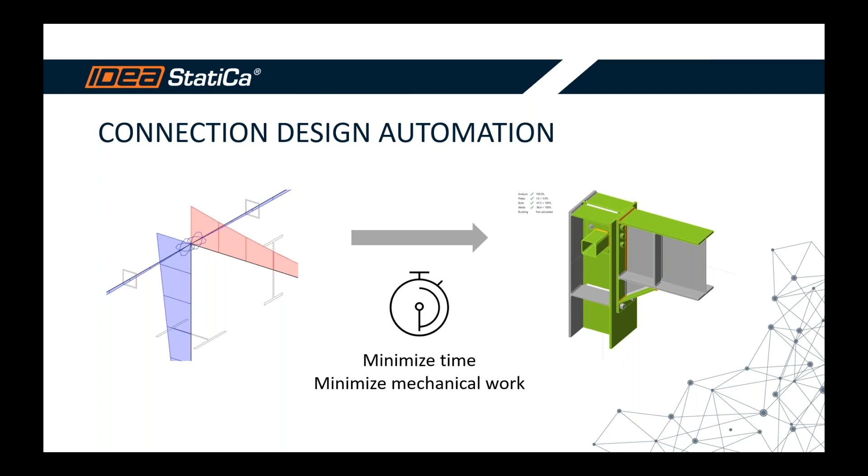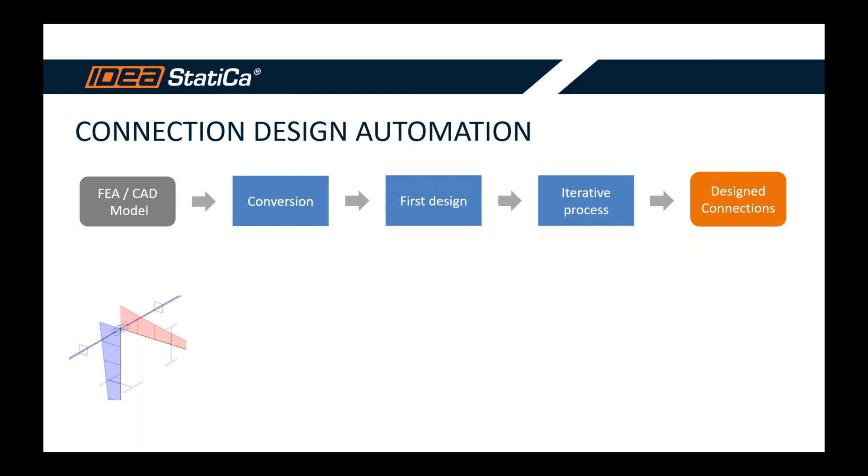And we've identified a couple of intermediate steps to get to that goal. First, you have your global structural model with your directions, members, internal forces. And that needs to be translated into something StatiCa can also understand. So once you are in StatiCa, you can do your first design, and most likely it will not be the optimal one right away. So you need to iterate and optimize, add stiffness, change the plate thicknesses, bolt dimensions, etc. And then you arrive at your final design. And finally, you are left with a well-designed connection.

The understanding part is facilitated by the IOM, Idea Open Model, and I will introduce IOM in a minute. This second part is again facilitated by our Idea plugin that is able to interact with StatiCa. And I will also talk about Idea plugin before Nathan shows it in a demo. So what is IOM exactly? Idea Open Model is an open source C# framework, and it can describe structures. And it can describe them in a way that StatiCa can understand them.

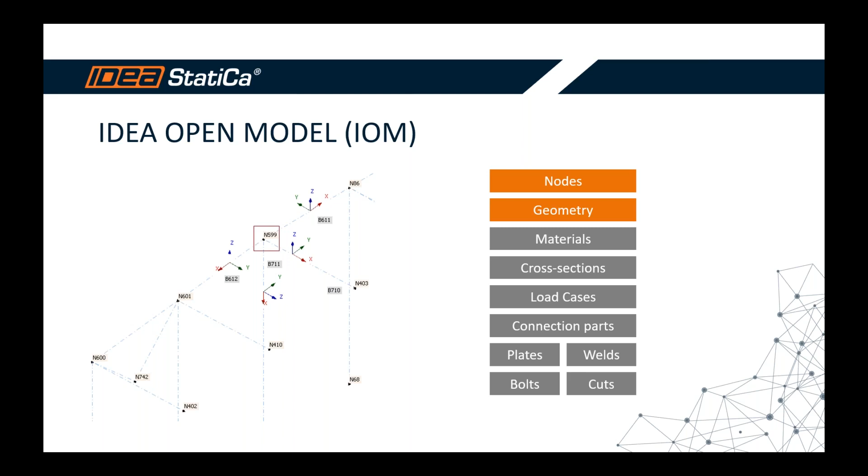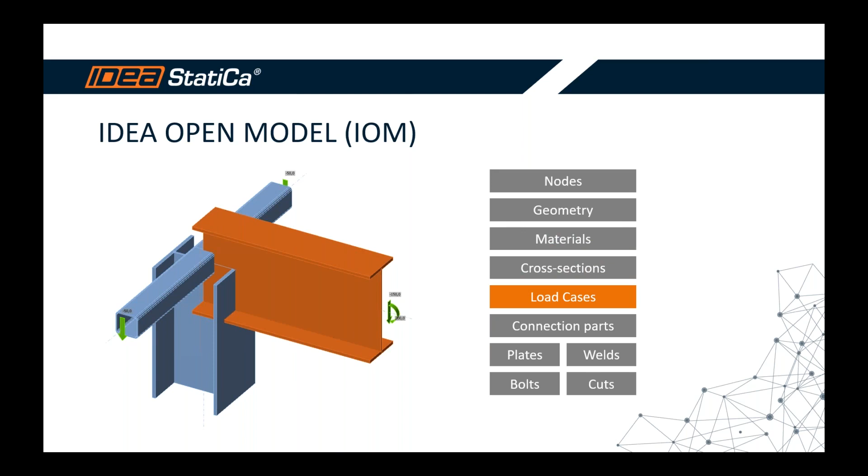And let's look at the IOM. Let's look at the parts that compose the IOM. So in the IOM, in the open model, you have your nodes and your geometry, firstly. So directions of your members, their local coordinate systems, etc. Then you also have cross sections and materials that are used in the model. Also, there are internal forces that we use as actions to load our connection models. And finally, the IOM is also capable of storing the connection parts.

If you are a user of StatiCa connection, you know that you apply and construct the connection using manufacturing operations. What is stored in the IOM are not the manufacturing operations themselves. These are just the basic parts, exploded operations into very easy to describe and very easy to communicate parts, such as plates, welds, bolts, and cuts.

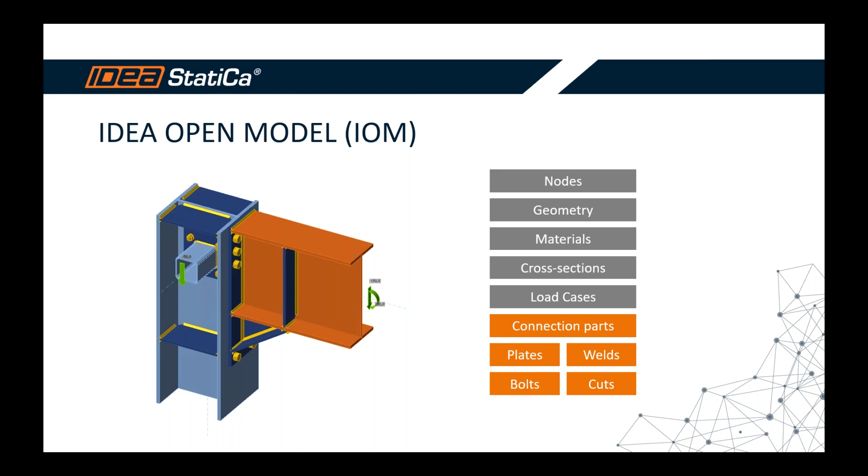Now, I just want to briefly mention templates. Templates can be used to transfer manufacturing operations, and now I am talking about the ones that you use in a connection app, so end plates, wideners, and you can transfer them between IDEA connection files. So what templates do, they store information about these manufacturing operations and their sequence. So basically store information about the connection design. So I can take a naked connection on the left, and by applying a template on top of it, I can receive a designed connection on the right.

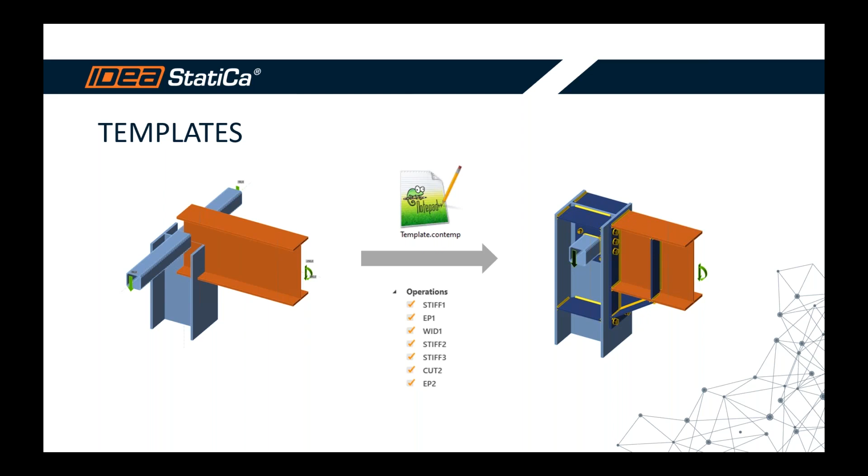Parameters are another very useful tool, mostly for optimizing. They are available in the developer tab, which by default is not visible in the connection app, and you can learn about accessing it on our GitHub wiki.

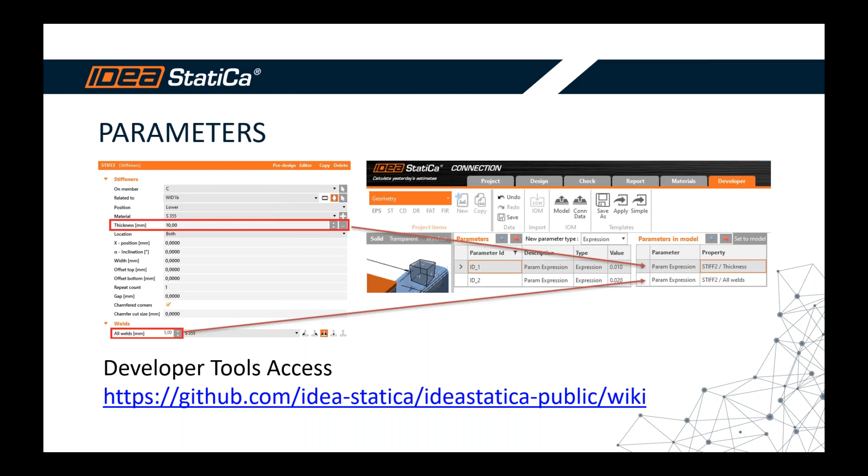But before the example, the last and perhaps the most important part, the Idea StatiCa plugin. This is basically our API, a way to interact with the software using code. And you can use it to take, for example, the open model file and create and save an IdeaCon project. This is a project that you know if you work with Idea StatiCa. It's a typical project file containing a connection design.

So you can create it using the plugin, and you can also use the plugin to then interact with it, apply templates to it, update your loads, set parameters, and of course run analysis and read the results of the analysis. Idea StatiCa plugin can be called using Python or any other language, and it can be integrated into your visual programming tools such as Grasshopper, Dynamo, Jupyter, Excel even.

So while we will be using C# today to demonstrate the workflows, don't worry. If you've never seen Visual Studio before, you don't actually need to know the ins and outs of everything, how to write the code in order to take advantage of all of this. You can perhaps use a tool developed by somebody like Ryan to make use of this.

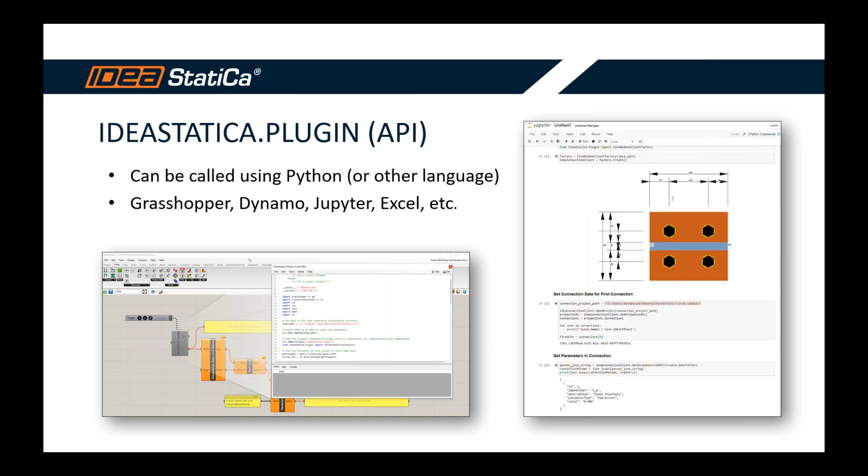So hopefully I managed to explain the difference between the IOM and the API. While the IOM defines the underlying model, the API allows you to interact with it. You don't actually have to have a license of Idea StatiCa to generate IOM, but you need it in order to use the calls in the API. That requires you to have a license and to have Idea StatiCa installed. You can also take advantage of our NuGet packages that are available, the Open Model NuGet for IOM and the plugin NuGet for the API.

So now coming back to my first slide, showing the steps you might take manually when designing a connection. We can take another look at it, but now using automation. So you would use IOM to translate your structure into something StatiCa can understand, and then use API to generate a connection model on top of it. In order to get the first design in, you would apply a template. And in order to get to your optimal design, you would get and set parameters until you arrive at a satisfactory calculation result. And then when the connection design is basically done, you might want to export the results, for example.

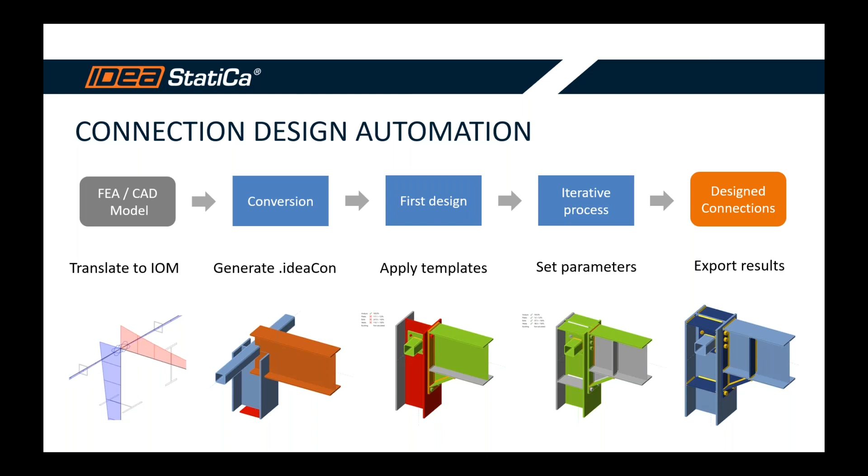So this would be it in a nutshell. And as I promised, enough talking. Let's see all of this in action. So I will ask Nathan to do the Weld optimization example now for you.

Thanks, Wojciech. So I just want to go through an example today and how we can demonstrate those workflows that we've been talking about. I'm just going to start with the example that I have open. And this is sort of a tube connection that we may have designed somewhere else on a project or on another project. And we might want to reuse this or the operations that we defined for this particular joint. But we also might want to be able to update weld thicknesses and stuff like that if the new connection that we want to use those operations on has different loading or slightly different topology or section sizes.

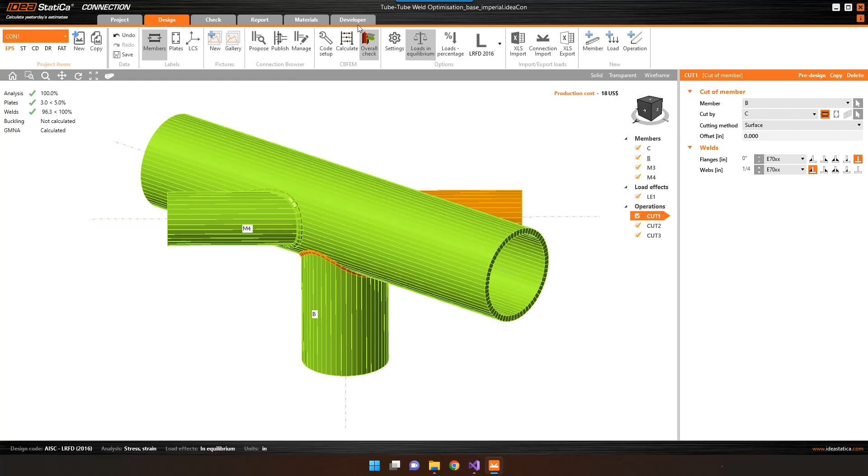So under the developer tab, what we can start to do is generate parameters, and we can assign parameters to operation properties in the model. So you can see here on the left, I've created 3 different parameters. I've got a col weld parameter and 2 chord weld parameters. And these are number parameters, and currently, I'm sorry, but these are required to be in metric units, just because the base units of the program are in metric. And also this value does relate to the throat thickness. We will look to improve this in future versions.

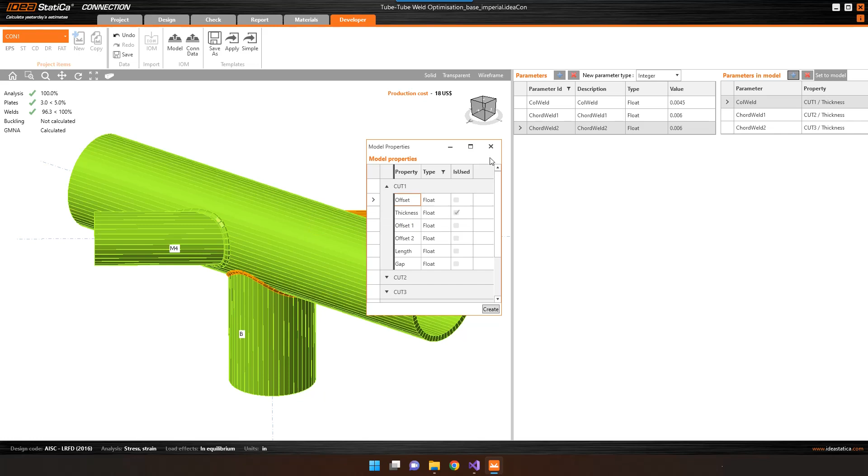So what I can do is assign this parameter to a model property or parameters that are in the model. And so you can see here cut 1, and I can assign these to a thickness, and in this case it relates to the weld thickness. So I can do that for cut 1, cut 2, and cut 3. So if I just demonstrate updating one of these values, I can change that value and then click set to model, and you can see that the weld is updated.

So what I want to be able to do is export this as a template so I can start to optimize these welds for another topology or another connection design. So under the developer tab, there's a save as template as well, and I can click that to save it as a template, and I'm just going to save it to one that I created earlier.

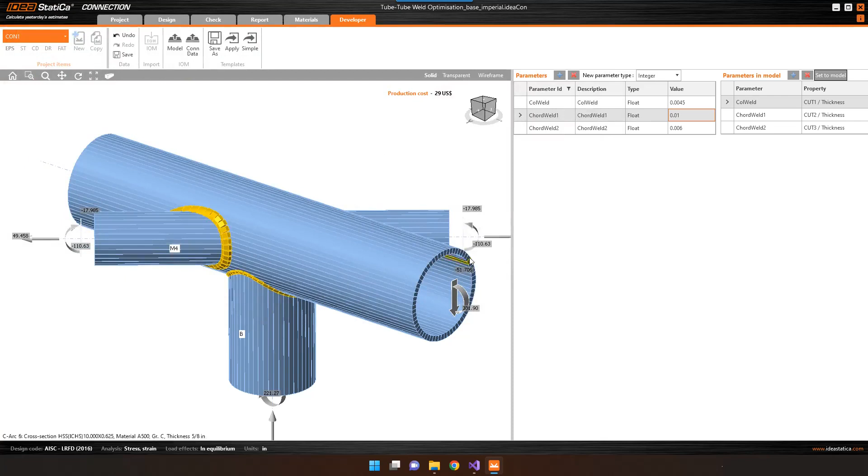So now I just want to introduce a Visual Studio example that I'm going to use to demonstrate how we can basically create that StatiCa file from the IOM, apply a template, and then we're going to look at how we can optimize the welds in that connection as well.

So just briefly on this project example, if I just go to the properties, it's a .NET framework and it's a console application. So just a simple console application. If I have a look at the dependencies, you'll see that I have my StatiCa plugin installed, and these are installed through NuGet packages. So that's how you can access our API through Visual Studio.

Just before I get back to the example itself, I'm just going to quickly show how you can look in the object browser to understand what is available within the plugin or API. The two main items that we're going to be looking at today are the connection hidden client factory and the connection hidden check client. So if I click on the check client, I can see all the available methods within the plugin API that are going to allow us to interact with StatiCa connection in the headless mode.

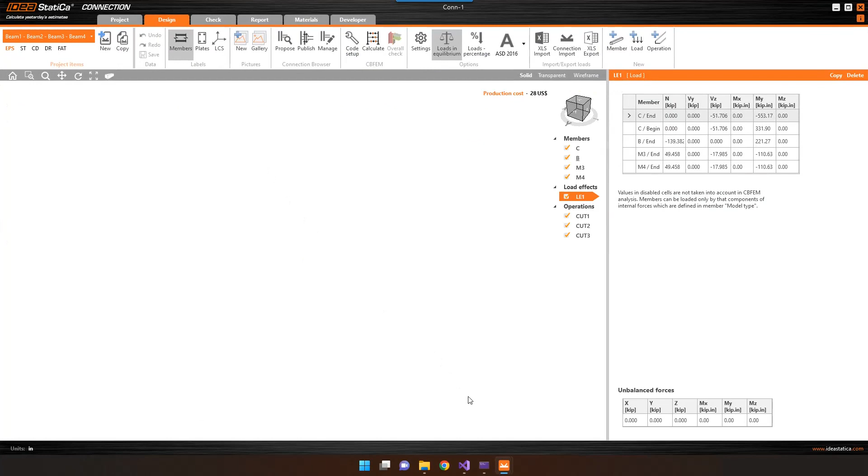I'll just go to the first one. You can see that I just have the base geometry, unbalanced forces, which is great. And then if I go to the second one with the template applied, you can see that the operations have been applied now. And you can also see that the parameters have also been applied with this file. So we're going to use the API to start to optimize these welds based on the parameters.

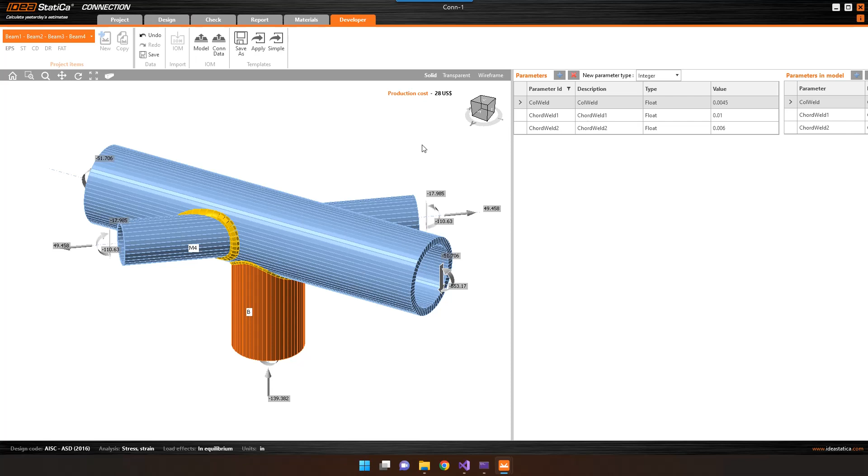So let's jump back to the example now. And we're going to go down to this region 3, the weld optimization. So what we're going to do here now is reopen that project with the template applied. And then the main thing we're going to do here is use the client to get the parameters. Now we're going to get the parameters, the JSON string, and we can deserialize that into parameters we can use in C#. What I've created here is a weld thickness optimization parameter.

And if I click into that, I've given it a couple of properties. And I've given it an initial value of 0.003. And again, these are in metric just to follow along. Increment value, and this is going to basically increment each weld parameter if it isn't satisfactory in the design through each iteration. I've also given it a max value if I don't want the weld to increase in value. And what this optimization parameter is going to do is update that parameter value with each iteration.

A couple other options is the save iteration. So whether I want to save iteration after each iteration through the loop, and then also a maximum iteration. So the optimization here is basically just a for loop, and at the start of every loop, it's going to run through those parameters and set the value.

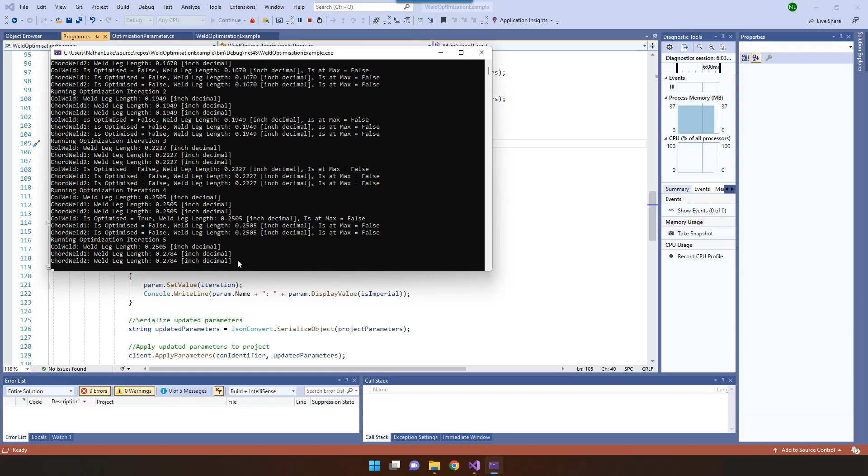And you can see after the first iteration, none of the welds are satisfactory, so they've been bumped up to 1/5 of an inch. And still, after the second iteration, the welds are still unsatisfactory, so they've been bumped up again. And again with the third iteration. And after the fourth iteration, you can see that the column weld has now been optimized. So the value of that will stay. And then the other two are still not satisfactory, so have been bumped up. And finally, after the sixth iteration, all welds have been optimized.

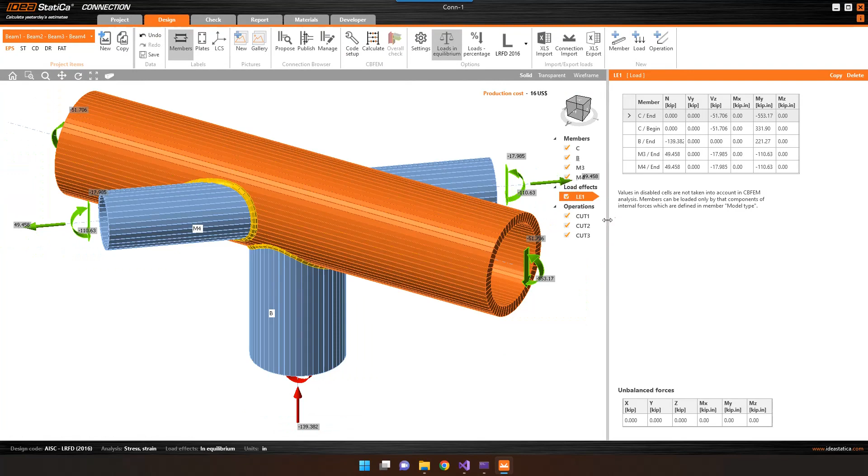So we can go to the folder now and have a look. You can see that we've got our 6 iterations. So I can click on that last iteration to view. And you can see that the welds have been optimized. Now we can calculate that. And you can see that everything's within a good limit. So that's the end of this example.

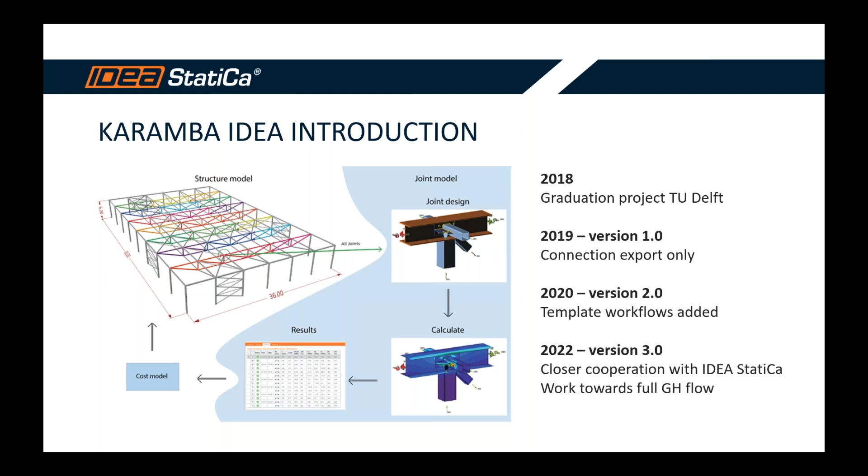And right now, Nathan will show a typical workflow, which I am really excited about, and I think you will also be really excited about this new functionality. All right, thanks a lot, Ryan, for this introduction. And you said it correctly. Let's hand it over to Nathan, see what he has to say and show regarding Grasshopper and visual programming workflows.

Thanks, Ryan, for that introduction, and thanks for letting me go through some of the amazing stuff that you've done with Karamba IDEA. So today I just want to go through a quick example, and I really just want to demonstrate some of the enhancements we've made to Karamba IDEA. And typically they are around the API calls that are available in IDEA Connection now.

So once you create your IDEA connection, how can I start to interact with that through the API and also in Grasshopper? So some of the things to start are connection costs, obviously connection results, but also modifying connection parameters as well, along with some enhanced template applications. So today I just want to go through a simple truss example.

If you're not familiar with Rhino and Grasshopper, Grasshopper is a visual programming tool or interface that allows you to create geometry and use its parameters to modify it. So this particular example's got a length that you can modify. I could also modify the divisions in the truss if I wanted to, the height of the truss.

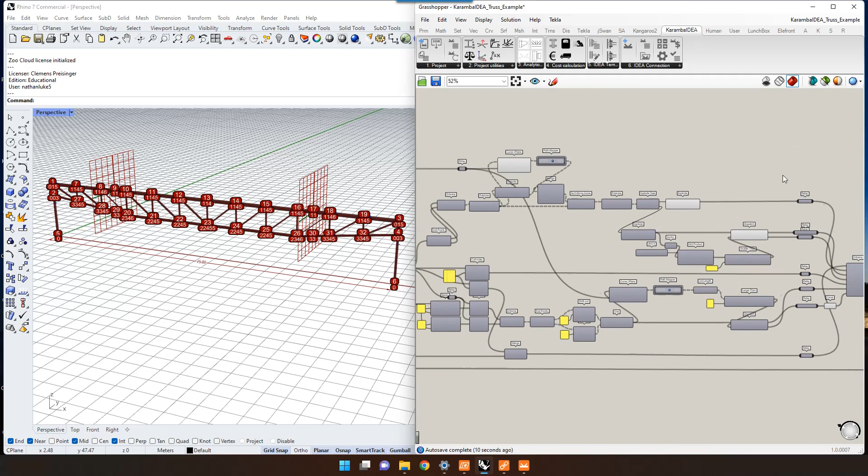This example here, I've also allowed for the location of the kink, and I also wanted to demonstrate the ability to locate truss splices as well on this truss. So where do I want these splices, and how can I move them around? And you can see the connections being added as well. So I'm not going to go through the geometry creation in any great detail. This example will be available, so you can have a play once you have it.

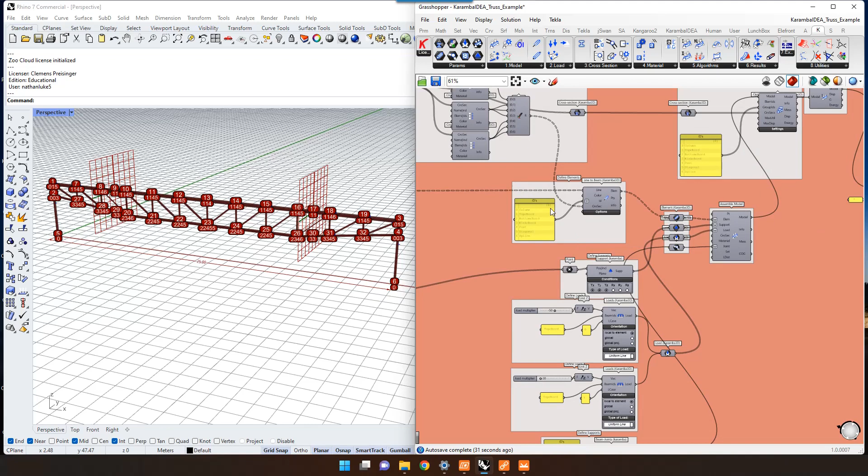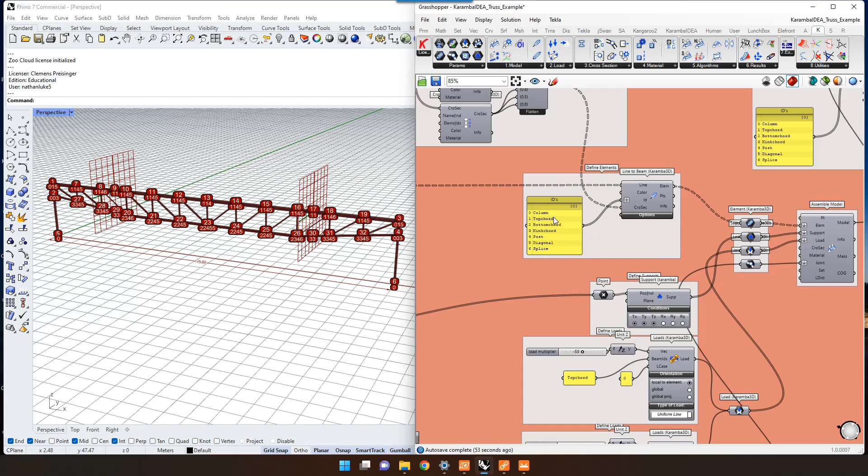So once the geometry's been created, Karamba 3D, which is a plugin for Grasshopper, allows you to generate that structural analysis model, and also do your real-time structural analysis within Grasshopper. And one thing that allows you to do is create groups of members. So if I've broken up my geometry creation correctly, I can start to assign these to groups. And in this example, I've split up the different groups in column, top chord, etc.

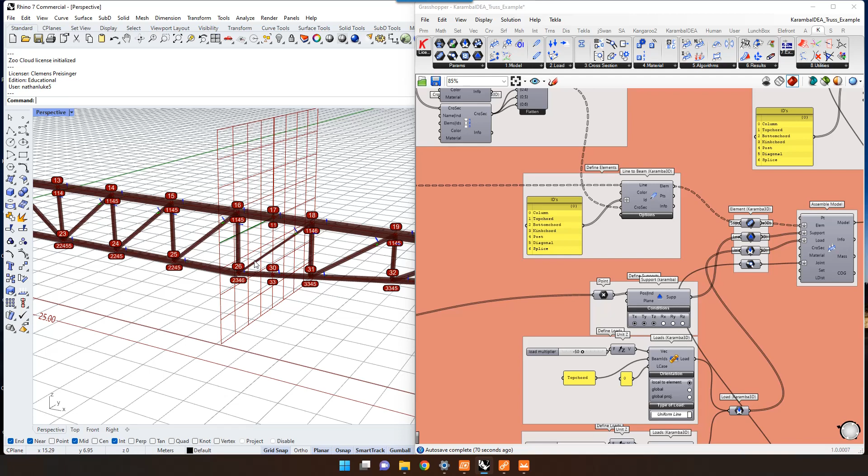And one of the other things I've done for this example is split the diagonals into a diagonal member and a splice member. So where the diagonal occurs at the splice location, that's going to be grouped as a different member, and that's going to tell the algorithm that categorizes the connection that that's a different connection type, and I might want that to be bolted rather than welded.

So once the structural analysis model has been created, we can start to use Karamba IDEA to work with IDEA StatiCa. If you've seen some of Ryan's examples in the past, he does a conversion for us using the Create Project component, and there hasn't been much change in the Create Project component. So that's still very similar. And what that's doing is taking that Karamba 3D model and converting it into a Karamba IDEA project, which we can use to create IDEA StatiCa connection files.

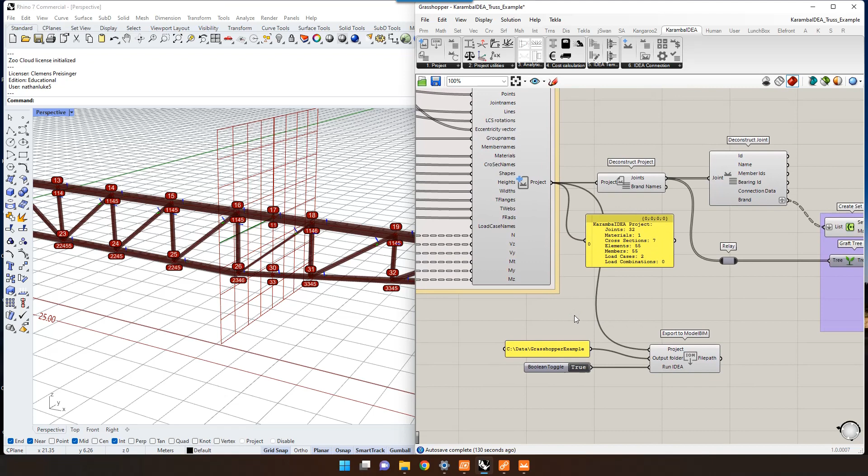Just before I get into the more advanced Grasshopper stuff, I want to show a component that we have added as a part of the recent enhancements, and that is the export to model BIM. And what this does is directly export an IOM or model BIM file, which can be imported directly into Checkbot.

So I've just opened Checkbot here, and under the import tab, I can import this IOM, my model BIM file. And what this is going to do is automatically create all the connections for us. So if you've done your structural optimization already and you just want to work on connections, or you want someone else to work on your connection design, you can do this and manage your IDEA connections natively within IDEA Checkbot.

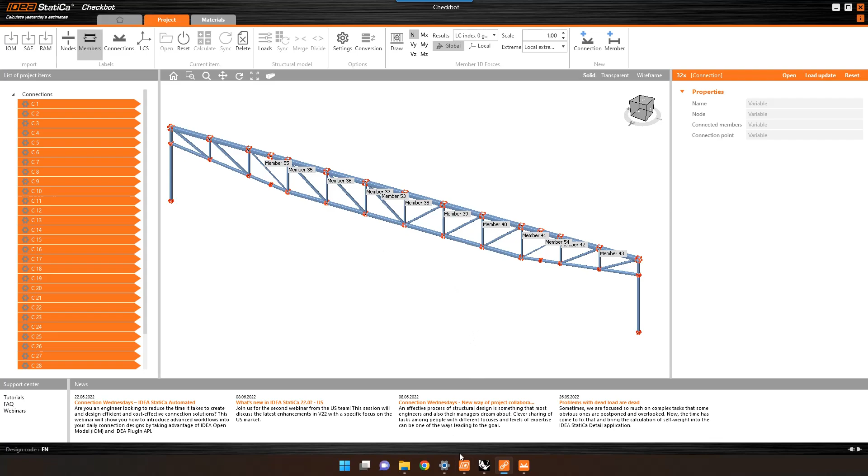So going back to Grasshopper, one of the major changes that we've made to the plugin is to be able to now deconstruct this project. So instead of saving connection files at the project level, we can now start to work with joints in more of a tree type structure.

So the deconstruct project component allows us to import that Karamba IDEA project and get a list of the joints available. It also can provide a list of all the brand names or connection categories that have been created based on this create project component. So this allows us to work with joints more flexibly.

So I still want to use the brands that have been assigned to the joints in this instance, but what I want to be able to do is reconstruct the trees, because I want to work with each of the categories of joints. And so using some Grasshopper magic, I can then reassign all those joints into lists based on their brand.

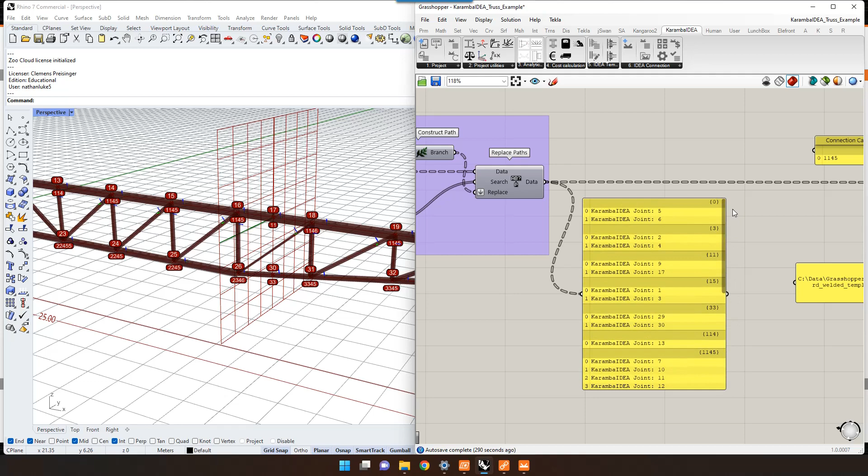So you can see here I've got two joints of brand 0, and they're obviously my bases of my columns. And I've got 4 joints of my 1145, which is my top chord connection. For this example, I really just want to work with my top chord connection category. So I'm just going to take a tree branch now and select my connection category and put in my 1145. And this is mainly just to reduce the calculation time down the line.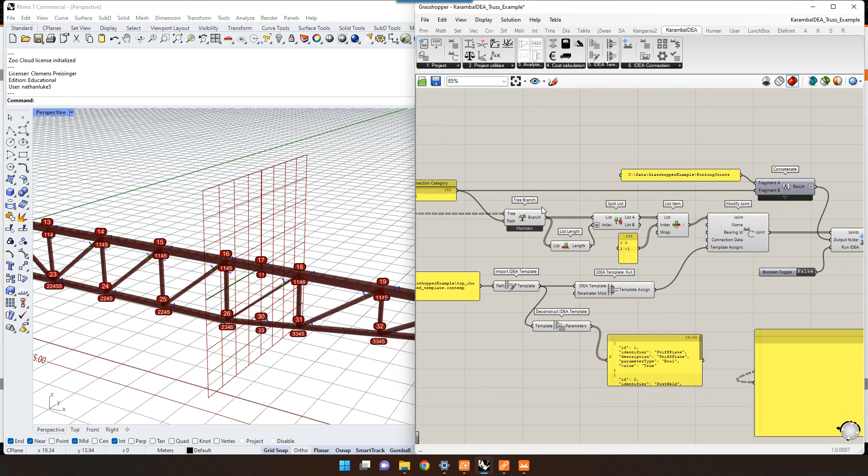Now, what I also want to do is, I kind of know this truss is just a one-way spanning truss, so I know that it's going to be reasonably symmetrical, and my joint 7 is probably going to be the most critical of this 1145, and joint 12 is probably going to be the least critical. So what I'm going to do here is take out all of those joints, split them in half, and then just take joint 7 and joint 12. So those are the ones I want to work with for this example.

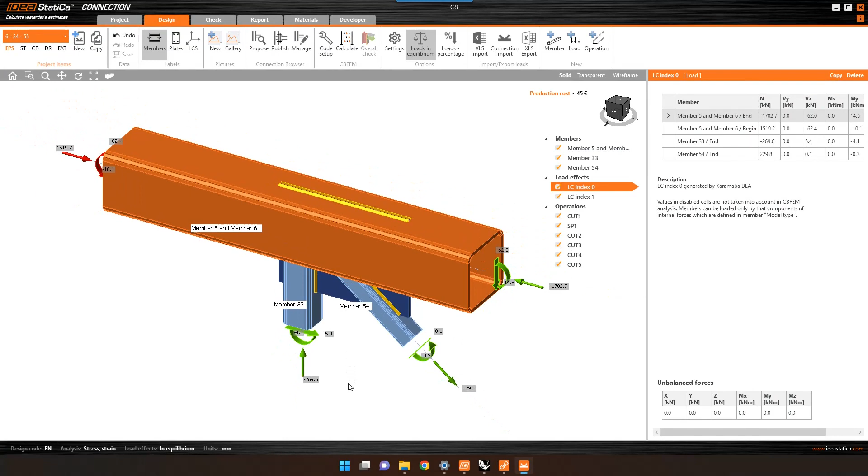So I've created a template for my top chord joint, and it's going to be reasonably similar, but what I've done with this one is created a couple of operations. You can see here I've got a stiffening plate that I've added, and obviously my post or chord and my diagonal. But what I've done in terms of parameters here is I've tried to create a template which can allow me to have, I guess, a maximum sort of connection type, and then maybe more of a minimum connection type.

So maybe I only want to put this stiffening plate on where the loads are very high, or where the loads are low, I don't want this stiffening plate at all. So what I've done here is I've created basically a Boolean parameter, named it stiff plate, and if that is set to true, then I'm going to have all the operations that relate to that stiffening plate as active, and if not, I'm going to have that stiffening plate removed.

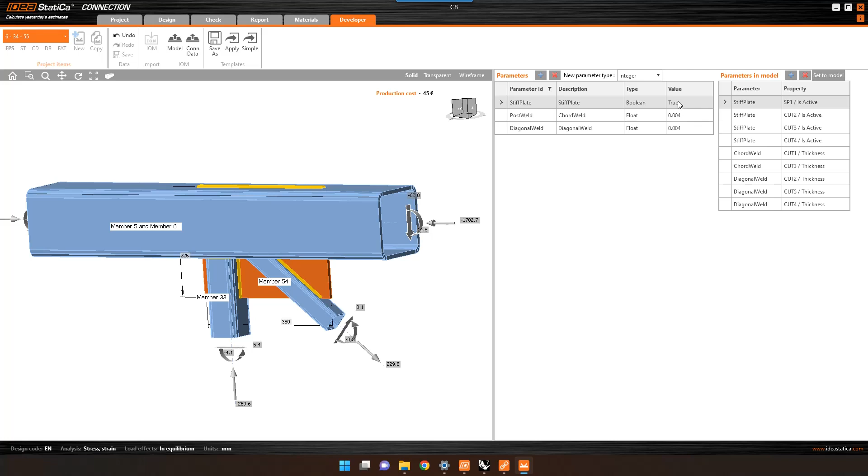So I can change this to false, and then I can set this to model, and then you can see that basically my connection is going to change to just a welded type connection with these members just coming in. So maybe I want to be able to change those parameters to change how my connection might interact. I've also again allowed the changing of the post and diagonal weld sizes.

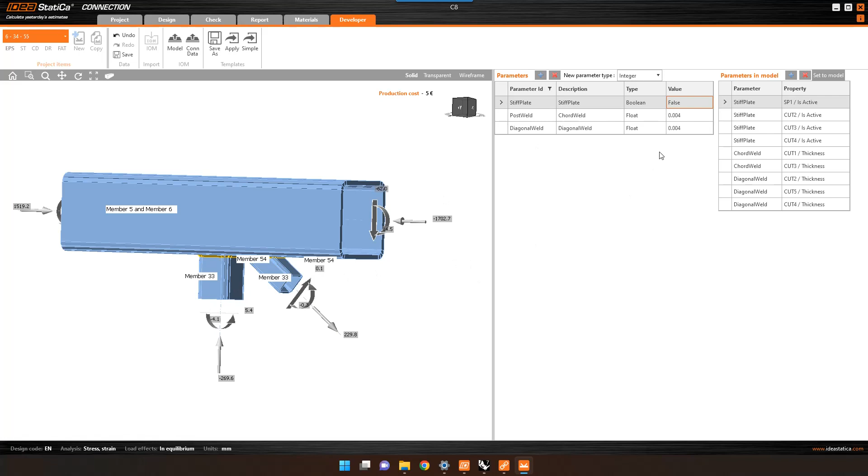So in order to assign that template which I've created, I've exported that as I did before, and I've just saved that in that folder. So I can use the import IDEA template component, and I can import that into Grasshopper, and I can also now start to deconstruct that template, so I can actually see what parameters are available in there. And what I might want to do is at the creation of that IDEA file, I might want to set how I want the parameters to be assigned.

In this case, I'm just going to stick with what is available in the template, and all I need to do is assign the template to the connection, and you can see here that I could also provide parameter modifications that I want to apply if I wanted to. But in terms of this, I'm just going to use a modify joint component. I'm going to take the joint, and then I'm going to assign that template to it. I could change the name or a couple of other things that will be available in the future as well.

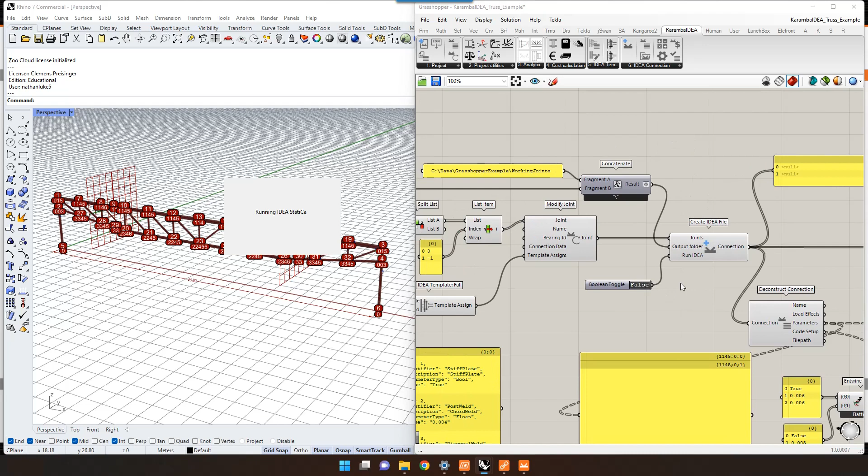So one of the other enhancements that we've made here is we've split apart the create IDEA file with the connection. So I can go ahead and bake those connections now, and you can see that running IDEA StatiCa pops up.

So you can see that the connections have been baked, and I've got my IDEA connection C7 and C12, and the modified basically just means that there's been a template assigned. So it's similar to how it was before. So I can go into my working joints here. I can click on the branch, and then I've got the two joints in here.

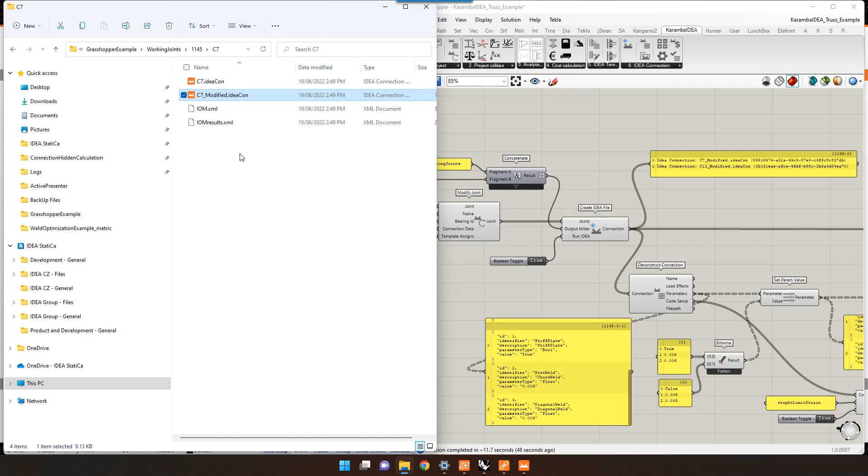So you can see, similar to before, I have my IOM and my IOM results, and I've got my connections as well. So I can click on this, and you should be able to see that I now have my template assigned and operations. Very good. So I'm just going to close that again.

And now what I want to do is be able to calculate that component. So first, I'm not going to do any modifications to it, but I want to calculate that and see how the base template works, you know, for those two extremes of the connection.

So those have been calculated, and you can now use a connection results component to basically get the results of each of those connections. And then you can also use a deconstruct item result. If you want, the result output does come out in JSON, so this is kind of how it's displayed as well.

So in terms of the connections, I can see the check status on these connections. For connection 7, I see that my welds are failing. And in here, I can sort of see where some of the welds on SP1 are not being checked correctly. If I look at the other connection, that seems to be going fine based on the stiffening plate being added to the connection.

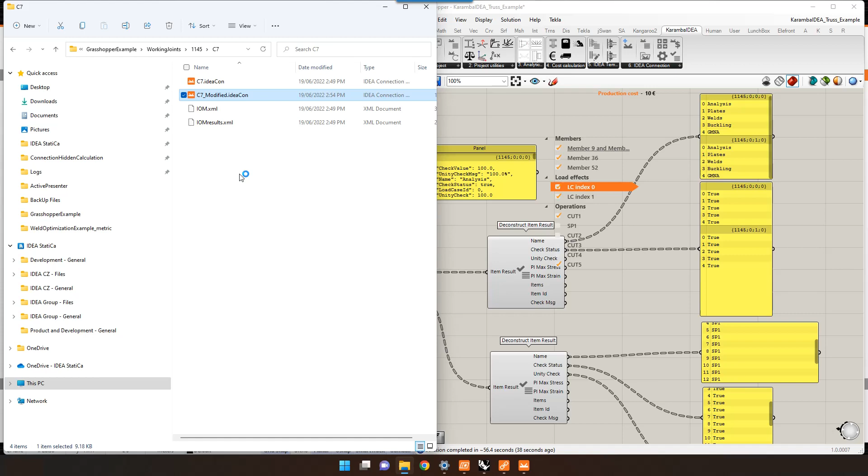So we can go back into the joints, and I can open up connection 12, and I can open up connection 7, and we can just see that everything's been done correctly. So for connection 7, you can see that the cut welds have been applied.

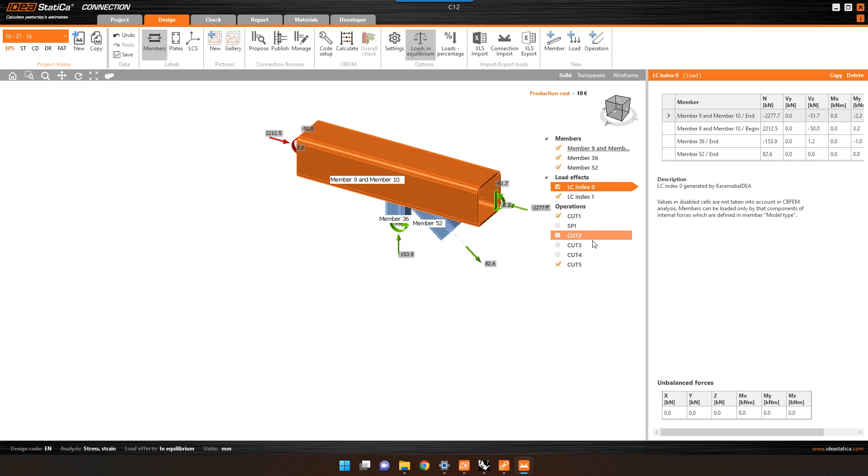And then if I go back to connection 12, you can actually see that the operations for the stiffening plates and cuts have been removed. And I can start to look around, and you can see that I've just got simply welded connections here.

So that gives an introduction to some of the improvements that we've made in Grasshopper, and I'm very interested to see how you guys might take this and start to look at different ways to use it to optimize structures and connection designs.

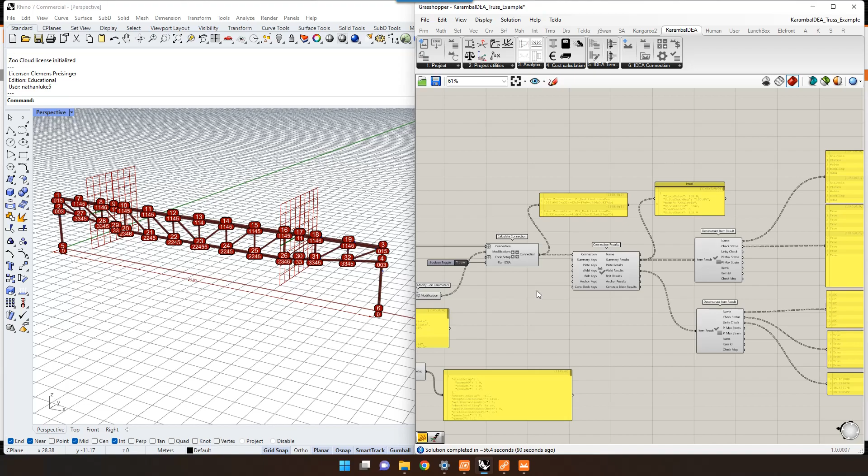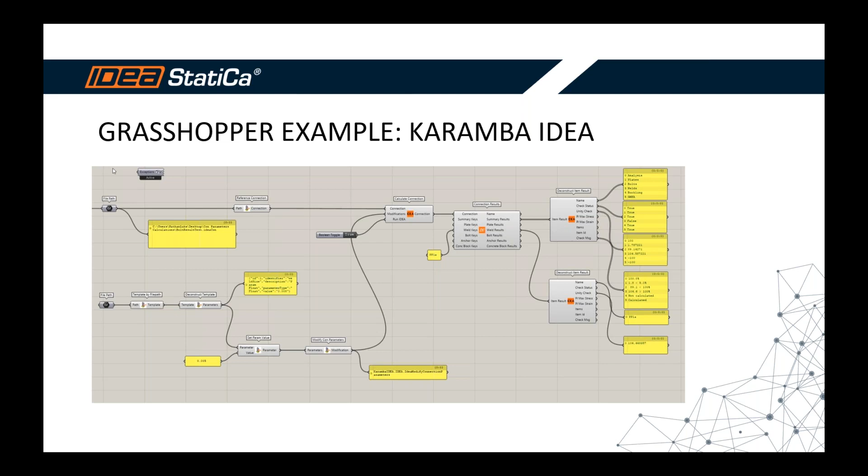Hopefully this has given you all an idea of what is possible, and certainly this is not the only thing that is possible using the API. We would love for you to be able to test it out.